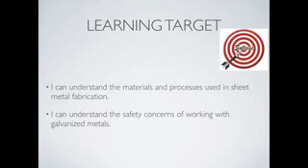Why would we use galvanized fasteners for building a deck? They're going to last longer, right? They're not going to rust out. If we use regular screws or regular nails on our deck, they're only going to last a few years, or they're going to rust through, and then the pressure of movement of the materials from spring to summer and frost to thaw is going to break all of those fasteners. So galvanizing is a huge advantage, and we'll talk very specifically about that in a couple of slides.

Materials in general. Sheet metal: metal formed into thin, flat pieces. Thicknesses can vary slightly. We have really, really thin, maybe considered like foil, like aluminum foil, or even like gold leaf, if we're going to put gold leaf on the edges of pages of books, or gold leaf lettering, maybe on leather handbags or on wallets or belts. All the way up to a quarter-inch thick would be considered plate. So by definition, this stuff over here is sheet metal.

The stuff you've been welding on, 11-gauge steel, it's about 1/8 of an inch thick. It's considered sheet metal, not plate. It has to be a quarter-inch thick to be considered plate.

We can use a lot of different kinds of metals. Obviously, we use steel not only for welding and cutting over here, but also for our toolboxes. Aluminum, brass, copper, tin, nickel, even titanium. Decorative metals, precious metals, gold and platinum and silver. Any of those materials can be formed into a sheet.

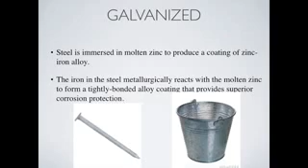The galvanized one is going to start to look really kind of white and oxidized after a few years, but it's never going to rust. And the powder coating shouldn't either, but the powder coating will chip off from rocks and scratch off and things like that. So there's galvanized fasteners in this picture. There's a galvanized metal pail.

Let's take a look at the galvanizing process. And this is a promotional video for the Galvanizers Association of America or something like that. So they're selling you on how great galvanized is. But I like the video because it shows a lot of different ways that it can be not only applied but used in the real world where you might see things that are galvanized.

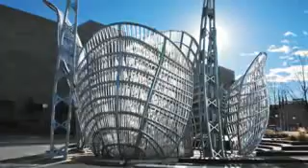An artful sculpture glinting under the sun. A sturdy bridge arcing over a rushing river. A beautiful architectural wonder. All these steel structures utilize hot-dip galvanizing for corrosion protection.

Throughout the world, new technologies and creative chemistry continue to evolve this 150-year-old process. Once used only for corrosion protection, hot-dip galvanizing is now specified for its cost-effectiveness, versatility, durability, longevity, and sustainability. Hot-dip galvanizing, protecting steel for generations.

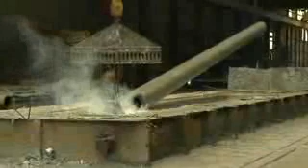Hot-dip galvanizing is the process of immersing fabricated steel into a bath of molten zinc. A wide variety of shapes and sizes can be galvanized, from small nuts and bolts to large structural beams to intricate artistic pieces. Galvanizing facilities are available throughout North America, and steel can be galvanized year-round.

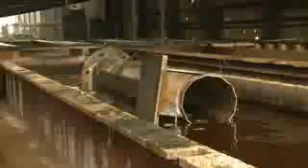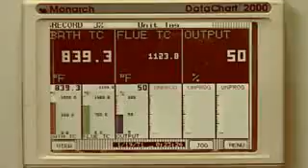Prior to immersion in the zinc kettle, the steel must be chemically cleaned to remove all oil and grease, dirt, mill scale, and oxides. After cleaning and drying, the steel is immersed in the molten zinc. The 98% pure zinc bath is heated to 840 degrees Fahrenheit.

While in the kettle, the zinc metallurgically reacts with the iron in the steel to form a series of intermetallic layers. After the steel is removed and cooled, it is inspected to check the zinc coating thickness and appearance. Any sharp drips or spikes are removed, and the thickness is measured.

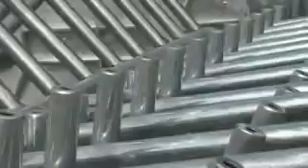The final look of the galvanized coating can vary from piece to piece. The appearance is determined by steel chemistry, zinc bath composition, and cooling rates. Whether bright and shiny or a matte gray, the final visual appearance does not affect its corrosion protection.

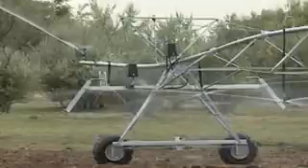While hot-dip galvanizing is primarily specified for its superior corrosion protection, it may also be chosen for its durability, maintenance-free longevity, environmental sustainability, and aesthetics. Steel is an abundant and efficient building material, but when exposed to the atmosphere, it immediately begins to corrode.

The hot-dip galvanized coating provides 3 levels of corrosion resistance: barrier protection, cathodic protection, and the zinc patina. The hot-dip galvanized coating effectively protects steel from the environment, providing barrier protection.

Galvanizing also provides cathodic protection, meaning the zinc will corrode first to protect the underlying steel. Even if the coating is scratched, the surrounding zinc will continue to resist corrosion of the steel.

As zinc is exposed to the environment, it naturally forms byproducts on the surface known as the zinc patina. The zinc patina further slows the corrosion rate of the zinc and acts as an additional environmental barrier.

Galvanized steel products deliver proven durability, even in harsh conditions. The intermetallic layers formed in the galvanizing kettle make the coating harder than the base steel. This provides unparalleled abrasion resistance.

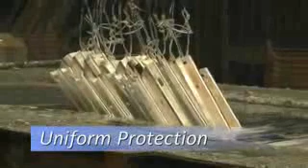Galvanizing also provides uniform protection. The zinc coating grows perpendicular to the steel, so corners and edges have the same thickness as flat surfaces. The immersion process also ensures hollow and tubular structures are evenly coated and protected inside and out.

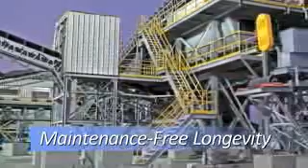Because of its maintenance-free longevity, hot-dip galvanized steel is utilized in some of the harshest environments. Commonly used on structures exposed to the atmosphere, galvanized steel can provide over 70 years of maintenance-free corrosion protection.

Hot-dip galvanizing is commonly used to protect steel embedded in soil and concrete or submerged in water. Galvanized steel has a proven record of longevity in all of these environments.

Maintenance-free longevity also delivers economic value. The initial cost of hot-dip galvanizing can be amortized over the entire life of the project.

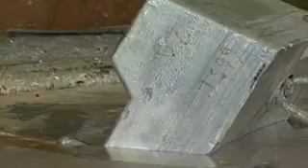Hot-dip galvanized steel is highly sustainable and provides many environmental benefits. Zinc is a natural element, essential to life, and abundantly found in the Earth's crust. Zinc and steel are 100% recyclable, making galvanized steel safe for future generations.

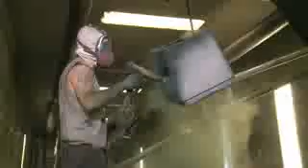Galvanized steel offers an attractive, natural finish that blends with its surroundings. But if the natural metallic gray finish does not suit the project, the coating can be painted or powder coated for additional aesthetic appeal.

All right. So benefits over paint: that galvanized finish can take a scratch. If paint takes a scratch, it's going to start to rust around that scratch, underneath that scratch, underneath the coating of the paint. Galvanized will always protect around that scratch. So it might rust where it was scratched, but it's not going to spread.

Use caution. Some of you might remember that first week of lab, as I was going through the stations, I said we never, ever, ever bring the propane torch from the copper pipe over to the galvanized sheet metal for doing our soldering of galvanized sheet metal. Does anybody remember why I said that? Yeah, well, I didn't say you could die. You could, I guess.

We can heat up galvanized sheet metal with an iron, but we never want to heat it up too hot, or we start to burn that zinc coating off of there. And when we burn that zinc coating it gives off fumes, and those fumes can make you really sick. Okay, so we're always going to use caution when we're dealing with galvanized sheet metal. Metal fume fever, the zinc shakes, the Galvi flu, those are some of the names that have been given to that when people get sick from breathing in those fumes.

And it happens over the course of time, typically, not just in one shot, but it's not something we need floating around the lab. Caused by exposure to fumes from the zinc oxide or the magnesium oxide coating smoking off of there. Okay? In extreme cases, loss of consciousness within a matter of minutes, chronic cough, bronchitis, things can develop over time. So we want to be careful with galvanized coatings.

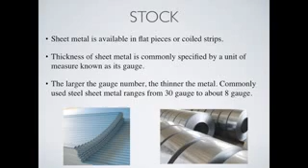Thickness of any of that metal is commonly referred to as gauge. So our 11 gauge sheet metal for welding and cutting, all the way to our 23 gauge sheet metal that we use for our toolboxes. Notice that as the number gets larger, the thickness is actually less. We weld on 11 gauge, our toolbox is 23 gauge. So as the number gets higher, the thickness goes down.

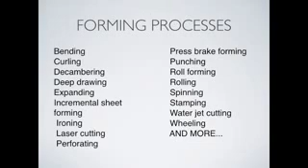Let's take that stock and let's make something. Whether it's sheet by sheet, or maybe more commonly off a large coil, we can take that stock and start to go through some different processes to create a usable part or product out of that stock. So there's a pretty long list right here, and this isn't even close to everything that we could do to sheet metal. Bend it, curl it, stamp it, roll it, form it, laser cut, water jet, all kinds of things we could do to that sheet stock, anything less than 1/4 inch thick, to make a usable product. Let's take a look at some of these.

Curling. Not rolling a stone across the ice, but curling, forming the edges into a hollow ring, eliminates a sharp edge. So where might you have seen metal that has been curled over underneath itself, making a round edge? That's a hem. On a toolbox we have a straight edge, not a round edge. Good thinking though. How about camping cups and bowls and plates that might be metal for camping? A lot of times they're powder coated, blue with white speckles. But your bowls and coffee cups that are metal would be rolled over.

Why would we curl over the edge of a coffee cup? Yeah, you're going to look like the Joker otherwise, right? We're going to take that sharp edge off of there.

Expanding, you see this in the lab over on the portable oxy-fuel stations. In other applications, maybe a set of stairs on a mobile staircase to reduce the weight. Pretty common for park equipment, playgrounds, picnic tables, things that can shed water. And a lot of times those outdoor applications are also coated with a plastisol. How many of you have been in plastics class? So you use plastisol in plastics class, right? Liquid at room temperature, heat it to a solid protective coating on this expanded steel.

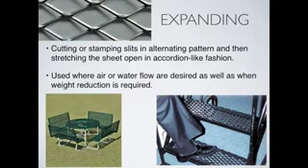Laser cutting. We have a laser cutter next door. The laser cutting of steel usually requires an assist gas. We don't have ours set up that way, so we usually just laser cut and engrave wood. But laser cutting uses a high-powered focused laser beam and a computer program to cut out pieces. Maybe we're cutting out little pieces that we're going to use somewhere else. Maybe it's just used for decorative cutouts. But either way, we get a really nice high-quality, very accurate cut.

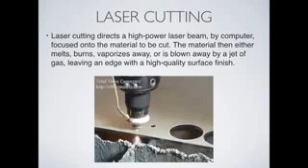So it works a lot like the pan brake. Typically, this would be hydraulic, meaning what? Hydraulic power? Right, ours is mechanical power, right? So all we do is bend as strong as we are and just use a little bit of mechanical assist. Next would be pneumatic, using what? Air, okay, compressed air. And then hydraulic, okay, using a fluid.

Hydraulic fluid is not able to be compressed. Air is. So we lose a little bit of power transfer when we use pneumatics. If I push on one end with 100 psi, I might only get 80 psi on the other side because the air compresses. Fluid doesn't do that. If I push on one side with 100 psi, I got 100 psi on the other side. Fluid does not compress. So it's a little stronger. We can bend maybe thicker metals with it.

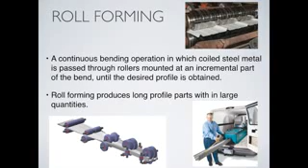So seamless siding could be done this way. Gutters, the same way. I have had seamless gutters put on before, and they can measure, say this piece needs to be 24 feet long, and they run the coil through the machine, and it comes out in the shape of a gutter on the other end.

Spinning. I got a video that goes along with this. This is pretty cool. You can take a piece of metal, and it's a flat piece of metal, right? And spin it at high speed, and as it's spinning, we can push on it and form it against a shape or against a die, right? It takes a while to make a product, okay, a little bit, and by a while, you'll see in the video, it takes them probably about a minute.

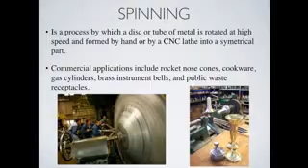So you might be thinking, wow, that's pretty quick. I could make something in a minute. Yeah, you can, but typically in sheet metal, we're like boom, boom, boom, boom. We want to make like 20 parts a minute, not one. But in this case, maybe we're making a nose cone for a rocket or some cookware. What you might see here in the video, I think they're making like a cake pan or something like that. Let's take a look at this.

Stamping. Stamping, any number of operations that can be done using sheet metal. Okay, this can include making a profile, trimming things, cutting them to their final size, maybe piercing or punching holes where things are going to get fastened through later, or deep draw forming, making deeper parts, almost like vacuum forming, those of you that have been in plastics class.

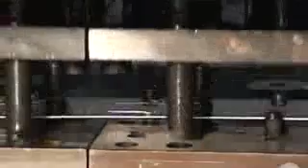So a stamping process could do any of these things or all of these things in one process. It all depends on how you set up the machine. Okay, being able to make a profile cut to size with holes in it, all ready for the next process. Multiple operations may be carried out on sheet metal stock either at a single die station or at multiple stations within a single stroke of the press.

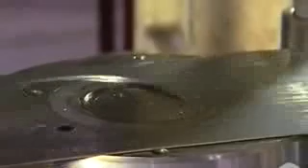Dies used in single station operations can be either compound dies or combination dies. Compound dies are press tools in which only cutting operations are done, usually blanking and hole punching. Combination dies are press tools in which a cutting operation, usually blanking, is combined with shaping or forming operations.

Multiple station operations are done with dies that have several stations. Each station simultaneously performs a single step in a series of operations needed to complete a part. Finished workpieces are discharged with each stroke. Multiple station operations can be performed using either progressive dies or transfer dies.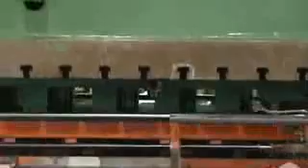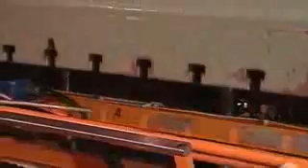In progressive die operations, parts are made from continuous coil stock and remain connected to the stock by a carrier strip during each successive operation until the final cutoff and discharge from the die. In transfer die operations, parts are blanked before or at the beginning of the sequential operations. Mechanical transfer devices grip and move the individual workpieces from die station to die station within a single die to complete a progression of operations.

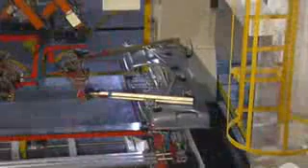With large workpieces, a tandem press line may be utilized. Parts are transferred by gripping devices from press to press, instead of within a single die. Each press within the tandem line holds its own tooling and performs specific operations to form, trim, and pierce the part.

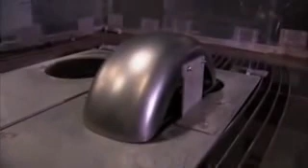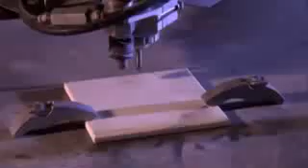Water jet. There's no notes for your water jet, but a really cool video here on the water jet cutter. A steel fender built for a custom motorcycle, and a ballistic-grade material designed for bulletproof, blast-proof armor. They're among the strongest engineering materials around. But today, they'll both be cut down to size by one of the world's most powerful forces. Forget about bubble baths and designer bottled water. This is the Seattle Research Lab of Flow International, the world's leader in ultra-high pressure, or UHP, water jet cutting.

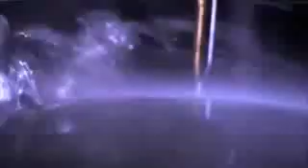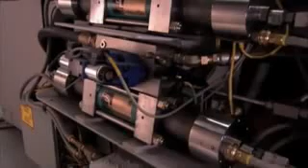So why is water a cut above a welding torch or diamond-edged saw blade? It all begins simply enough. A hydraulic pump takes in regular tap water and pressurizes it. For water, increased pressure through a small aperture equals increased velocity. And since, as we all remember from school, force equals mass times acceleration, increased velocity means serious sliceability. You can take a very small fraction of Niagara Falls and concentrate it in a very small beam, and that will be able to cut very hard material.

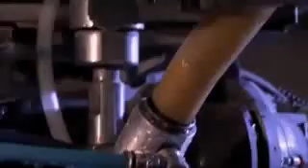Just like laser, we focus the light to make a laser beam. The water is forced through this tiny opening, which is ringed with a gemstone so it won't be cut to shreds by the water jet. Just like constricting a garden hose with your thumb concentrates a stream of water out of the nozzle, concentrating a volume of water through a tiny opening produces this.

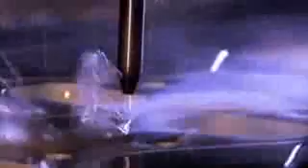At the business end of the jet, the water is traveling faster than any jet plane at Mach 4, 4 times the speed of sound, at a pressure of 87,000 pounds per square inch. So at that point, it's really one of the most powerful water jets on Earth. Super Soaker's working on that technology right now. 87,000 PSI, you'll be able to slice your enemies in half.

Fastening sheet metal. So now once we have these parts, we will put them together. You guys are very familiar with rivets. Rivets come in all different diameters and all different lengths. Threaded fasteners, we talked about using like galvanized screws and stuff like that on a deck, or even ungalvanized stuff like you're probably pretty familiar with machine screws, but we have to drill a hole first.

Other screws we don't have to drill a hole first. Yeah, some are called self-tapping, where they have a little cutter on the end. Others are called self-piercing, where they're actually tapered to a very sharp point, and they'll just pierce right through and then thread their own hole as they go between pieces of metal.

Another one here is resistance welding, sometimes called spot welding. We used to have a spot welding machine here in the lab. It doesn't work very well with galvanized sheet metal. The tips of the spot welder would get corroded all the time from the zinc oxide coating.

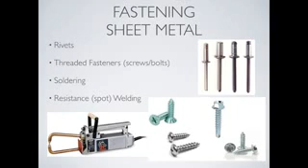So as that electric current flows very well through a conductor like copper, it doesn't flow quite as well through something like steel. So what we have there when it doesn't flow well is we have resistance, which creates what? Heat, right? We talked about that from day one. So that resistance creates heat, and now we have a little melted, molten nugget, and those two pieces are actually welded together. Resistance welding or spot welding.

So resistance welding or spot welding is a method used to join overlapping pieces of sheet metal. The two electrodes clamp the metals together, and then a quick jolt of current flows through the electrodes and through the pieces of metal that are pinched together. Creates a little nugget. That resistance causes heat, and the two pieces are welded together in a little spot. Hence the name spot welding. Okay? Works through resistance. The resistance of the metal between there is a little higher than the resistance of the excellent conductor of copper.

You'll see robots doing this a lot. If you've ever been in any factories, especially cars, if you ever get a chance to tour a factory that makes cars, there'll be robots running these spot welders all over the place, knowing exactly where to be, pinched together, a quick tack, quick tack, quick tack. Your door panels are put together that way. If you look at your car, you'll see a bunch of little round holes when you're looking at the paint, or little round spots where the nugget of molten material is.

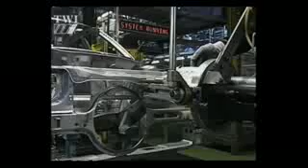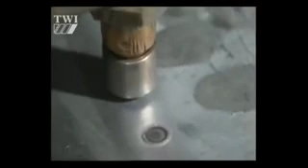So here you're seeing it done in an auto plant, fastening things that were probably formed on a stamping machine, right? Earlier in the press, so the sheet metal was formed, profiled, had holes pierced in it, openings for windows and door handles and mechanisms, and then placed over one another, overlapping, and then the robot can come in, or an operator carrying the spot welder can come in and spot weld those individual pieces. Can also be done on a roller.

So this is done on a line. Look at that. Same process. Electric current runs from one wheel to the other and through overlapping pieces of metal.

All right. Is that it for your notes? Okay. We've got a couple of videos here. One of them is making toolboxes, and the other one is making car door panels. Okay, let's take a look at these two videos.

Thinking inside the box can be a good thing if you want to organize your tools. And of course, we're referring to the toolbox. Proper tool storage keeps any work site running smoothly and efficiently. And today, you can really go big on the concept with units designed for mechanics and other pros. With a professional toolbox, you'll never have to rummage around for the tool you need. There's a place for practically everything in one of these mega tool chests.

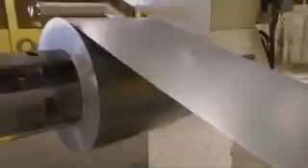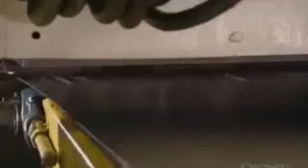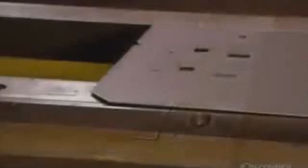It starts with a coil of heavy-duty steel. It unwinds into a punch press that cuts the metal into panels and punches holes for later assembly. Each of these panels will be transformed into a toolbox drawer. They feed the panels into an automated bending machine. It folds them on 3 sides to create the back and sides of the drawer. It also folds over the rim. This adds strength to the drawer and gives it a smooth edge.

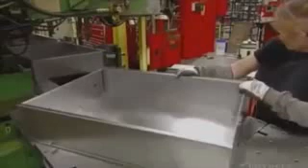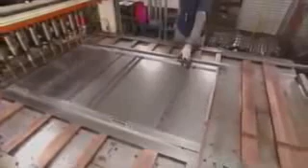The assembler slides the front panel onto the drawer, then an automated welding gun reinforces the seams and secures part of the lock mechanism. To build the toolbox cabinet, a worker arranges stiffeners and lock bar grids on the back wall. Then it's over to a lineup of computerized welding guns. These guns fuse the stiffeners and grids to the panel. Each part gets numerous welds to ensure the unit really holds up.

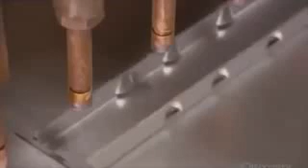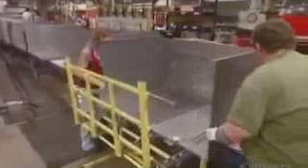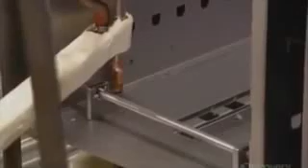The cabinet's sidewalls are next. Workers prop them up with supports as they weld the panels to the back wall. With the toolbox right side up, they install the top. They turn the cabinet around and, working from the open front, slide the lock bars into their slots. Then they build the front framework and weld ledges for the drawers to the support grid. They add a panel to the bottom end of the cabinet and weld the entire perimeter.

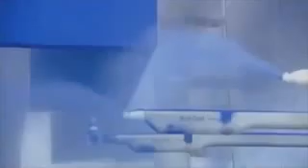Now it's into the paint booth, where spray guns coat everything in a layer of powder paint. The paint is tough and solvent resistant, so it will hold up to oil spills in a garage environment. They install the rest of the locking mechanisms on the front of the cabinet. Then, using a guide, press the adhesive-backed logo into place. They now snap the drawer slides into holes on the cabinet's side walls. These slides are equipped with roller bearings, which will enable the drawers to open and close smoothly.

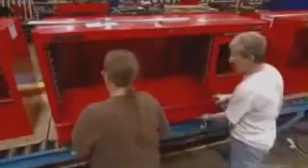Here, they make use of the holes punched into the drawers earlier. A quick click, and the drawers are fastened to the slides. The drawers come in a range of sizes to accommodate tools of different proportions. The shallow compartments will hold wrenches and screwdrivers, while the larger ones have been made for the big power tools.

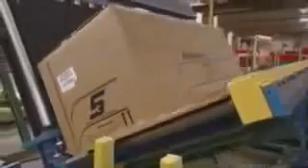Workers now encase this mega tool chest in plastic and cardboard. But this job is not quite wrapped up. They tip the unit on its side and send it down the line to get wheels. The pre-packaging prevents dents and scratches along the way.

A worker bolts casters on each corner of the cabinet to allow it to be easily moved around in a garage or any other work site.

Add-ons can be purchased for these tool chests, so the storage possibilities are virtually endless. And that's an organizational approach that you can't really mess with.

Car doors have come a long way over the last century. They're lighter for improved fuel efficiency and stronger to better withstand the force of an impact. They also now contain a lot of electronic gadgetry like speakers and power windows, all of which enhances the daily commute.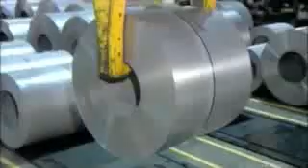A car door is one of the first things many people reach for as they start their day. So let's unlock the mystery of how it's made. It all starts with carbon steel, an alloy that's strong yet malleable.

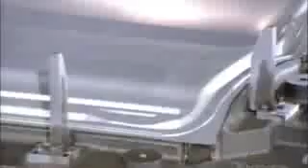Machinery uncoils and straightens it. A large blade slices it to the desired length, producing sheets called blanks. Then it's over to a powerful press. This particular one is a trial press, which offers a better view of the process than the one on the production line. The press forces the blank into a die, giving it the basic shape of two car doors. It's a design that's been engineered for both aerodynamics and strength.

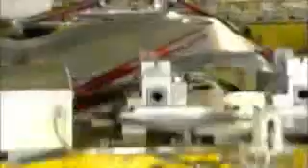Back on the production line, the main press is churning out car doors. An automated device with fingers then grips the newly shaped steel and transfers it to a punch cutter. It separates the two doors and trims the excess metal from the edges.

With the outer door panels now complete, a handler inspects them for bumps, dents, or scratches. He approves only those that are absolutely flawless.

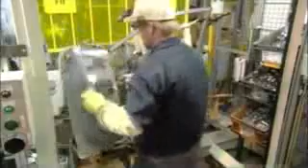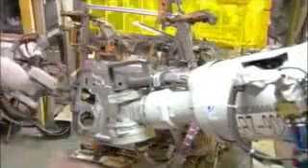The next worker arranges the window frame, a reinforcing plate for the hinge, and the inner door panel, all in a special clamping fixture. Its fingers grip the parts to hold them in position as the fixture rotates and two robots move in to weld them together.

At the next station, the worker arranges steel bars and tubes on a robotic platform. They add strength to the door, so it will better withstand any impact. He places the inner door panel over the bars and tubes. The robotic platform angles the parts for welding.

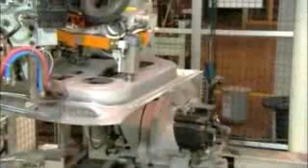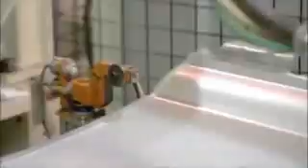Another robot applies adhesive to the rim of the outer door panel. More robots dab adhesive at strategic locations. Those dabs match up to the tubes and bars on the inner panel as they meet the outer one. A special press then folds the lip of the outer panel over the inner one. This hemming gives the assembled car door a neater edge.

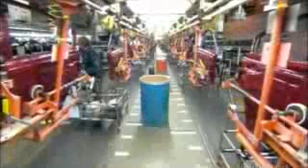With the inner and outer panels now joined, the car door undergoes rust-proofing, paint, and other protective treatments. Now, over on the assembly line, a worker fits the handle into its niche and bolts it to the door from the other side. Chrome trim is clipped into place.

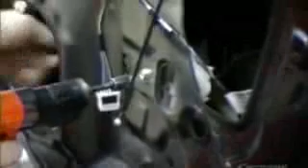Moving down the line, a worker installs a small fixed window in the groove of the frame. He uses a plastic protector to prevent scratches as he slides the larger window into its slot in the door and links it to a power lifting mechanism inside. He separates the two windows with a metal divider.

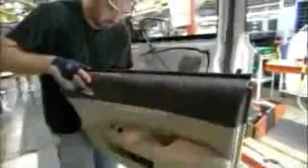At the next station, this car door gets an automated side view mirror. They're now ready for the inner panel and its workings. The employee wires the panel to the door and snaps it into place. He tests the power windows and they close to a tight seal, indicating a successful installation.

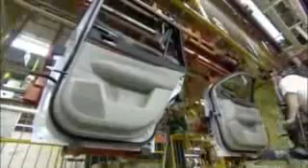A special elevator now lowers the completed car doors 6 meters to the next station. A worker unloads each door with the help of a pneumatic arm. This device shoulders the weight of the part and correctly positions the door for installation.

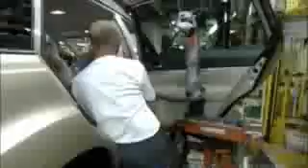He drives bolts into hinges to attach the door to the car. On the door side, the heavy-duty reinforcement plate surrounds the hinges and supports them. The whole weight of the door will hang on this plate as it swings open and shut.

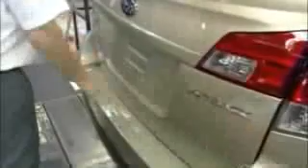With all the panels installed, it's time for the final adjustments. They call this finessing. They examine each panel to confirm that it's flush to the rest of the car body, and they tweak the installation job where needed. Finally, they're satisfied the assembly is airtight, so it's time to close the door on this production.